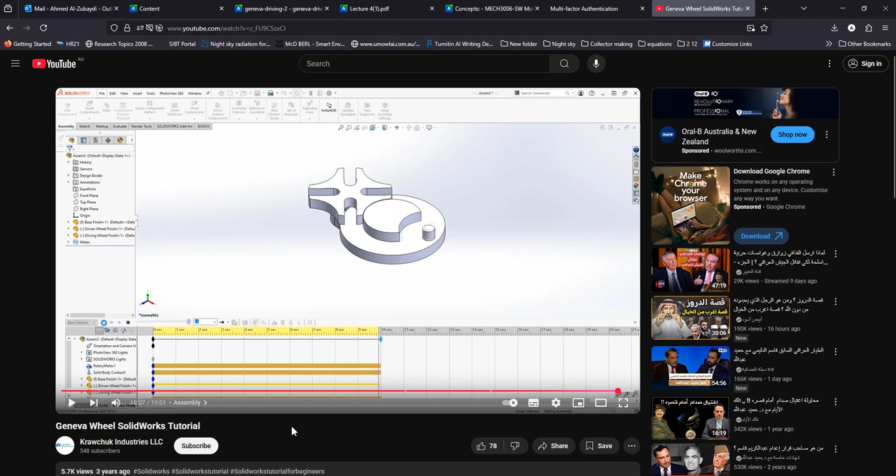We're going to go through this later, how to make the link between the 2 parts and make it operate the same way. It's going to make it run now. Just give me a second. Okay, so it's going to work like that.

We're going to add a motor to this part, and this will make the counting, or timing, for the other gear. After that, we're going to take some results, and this is something we need to learn during tomorrow's session.

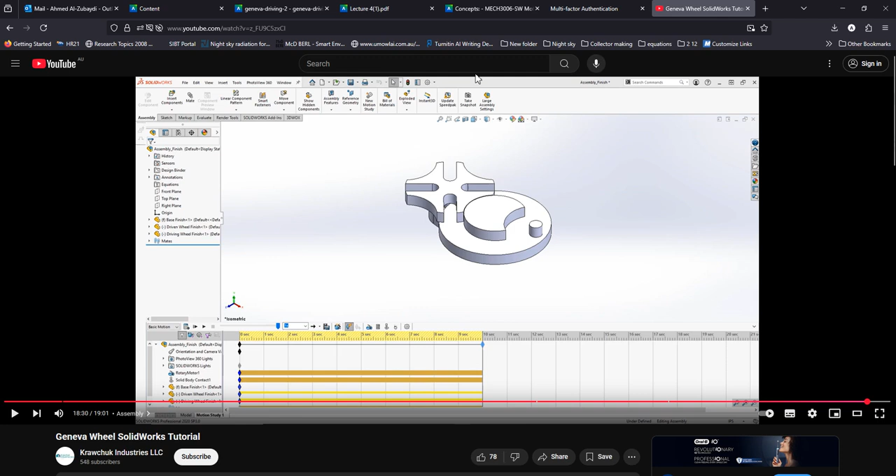Okay, and where is that? Well, the content — let me go to the material for this topic. Week 4 material for the practice session, that's what we're going to work on basically tomorrow.

You can see we have the practical instructions and the attachment for the parts, where most of the CAD models are made for you, and we're only going to apply some of the work. That's what we find as instruction here, like the SolidWorks motion analysis tutorial basics, how to add the motor — actually I can open this one for you.

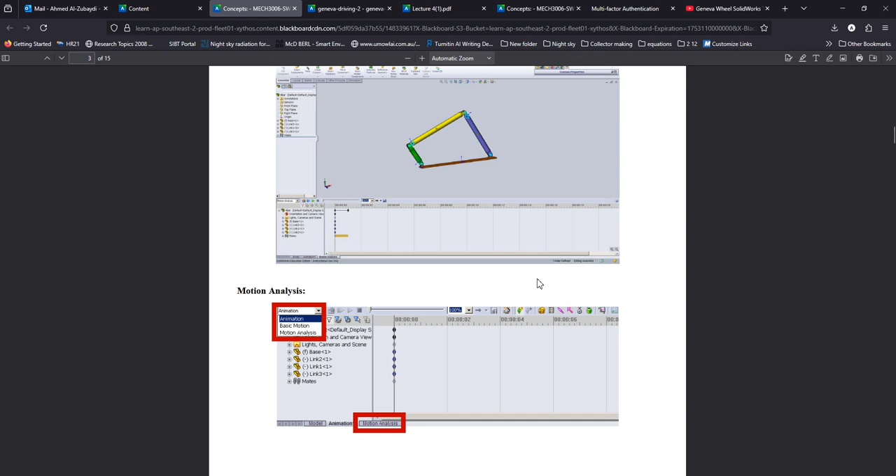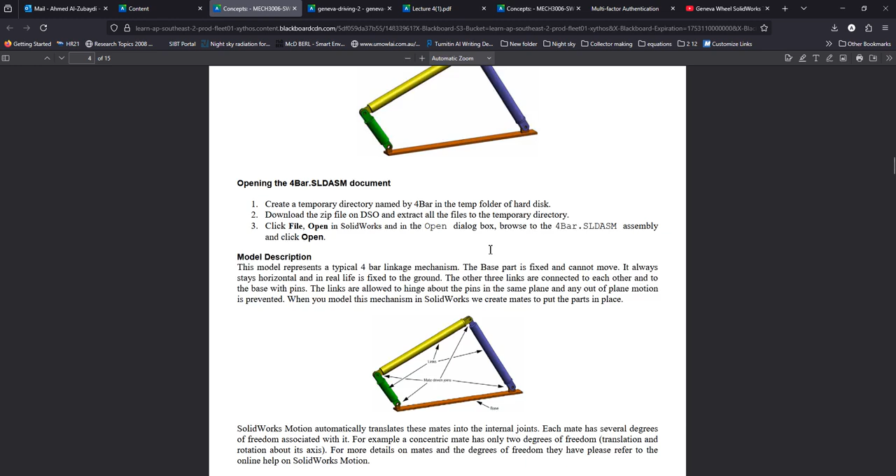The basics on how we can do the SolidWorks motion analysis, that's what we're going to download. We're going to do the animation without the study first, and do exercise number 1 for the 4-bar mechanism. You can see the work is going to start very easy.

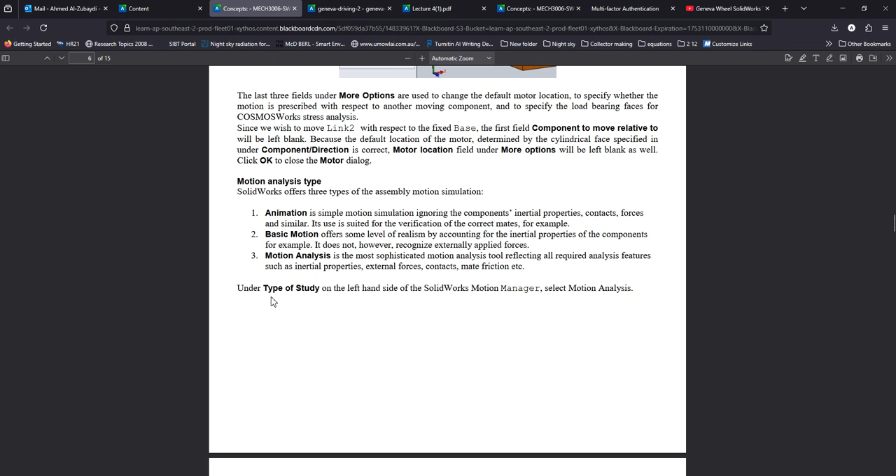We're going to open the things, do the mating, do the orientation of the camera view. We're going to select this point to add the motor, decide what the RPM value will be, do more options, do the work, and then do the animation, the basic motions, and the motion analysis, and we can simplify that.

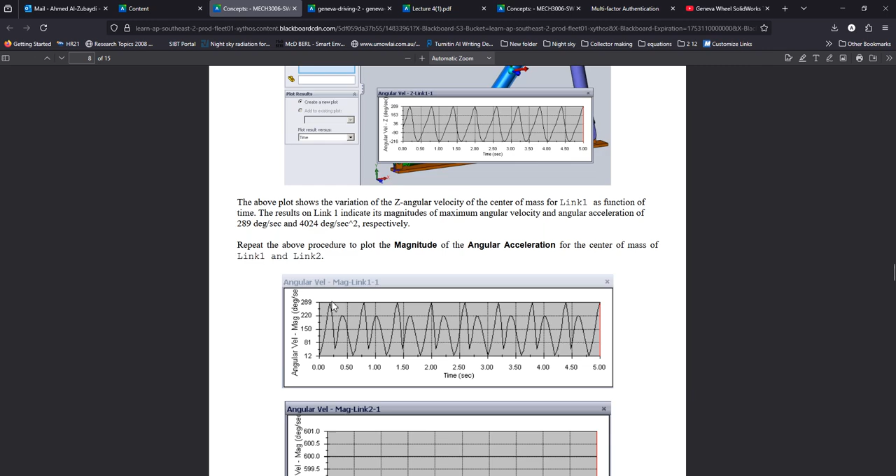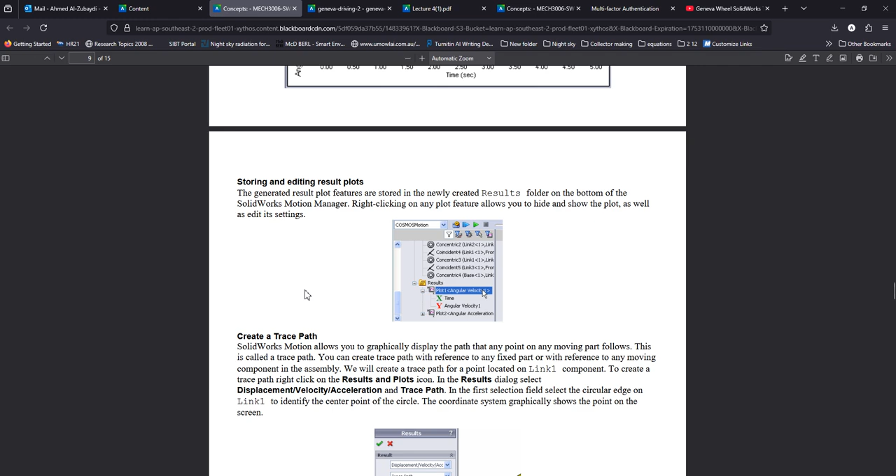So mainly we're going to do the motion analysis, and it will give us this panel. To make it run, we're going to have these drawings, and mainly this will be the drawing you need to find, copy and paste in your report, and that's what we're going to do for the first few weeks. That's for the starting and ending of the result plot.

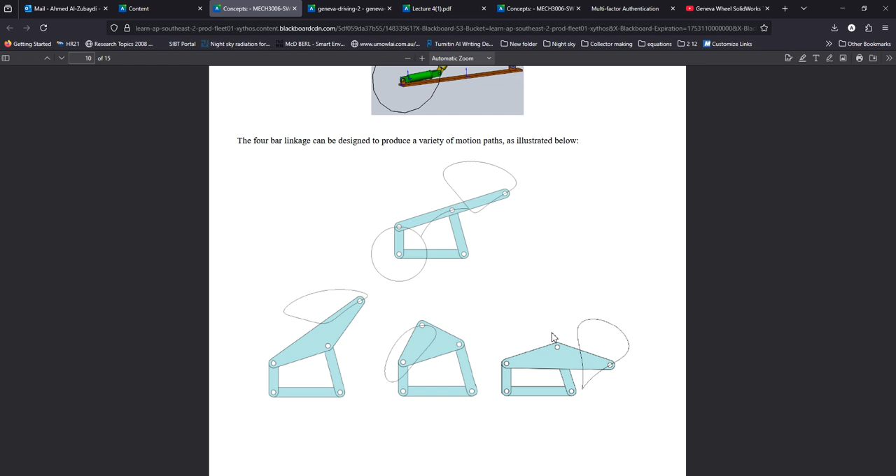That's if we add the result at this point — it will give me what the movement for this one will be, like the path of this point. You can see we can sketch the path of every point just to see the movement of this mechanism. That's the cam movement, or mechanism movement, and this is what we need, for example, to make certain mechanism applications for our work.

The second exercise is going to be about a slider crank mechanism. Usually it's going to be locked until, again, we do some work about the basic motion.

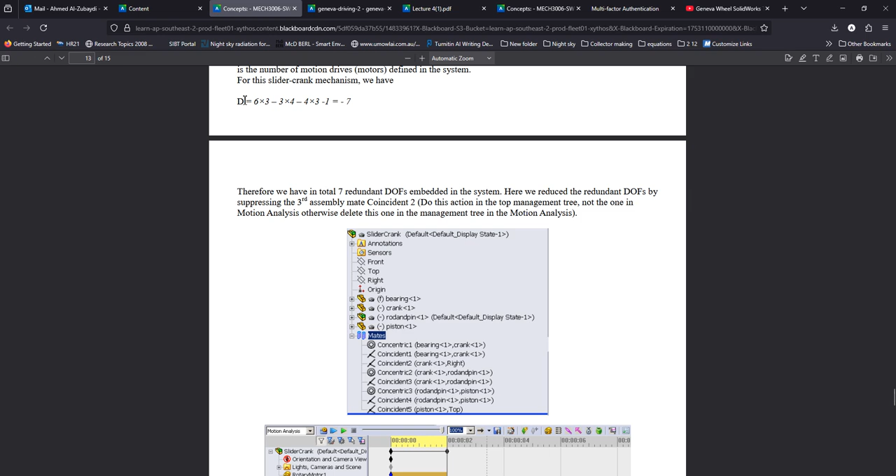It's going to actually give us some problem, and then we're going to do work on that, because the number of links is going to be more than degree of freedom, and it's going to be negative. So we need to do some changing in the mates and run it, and it's going to run after that.

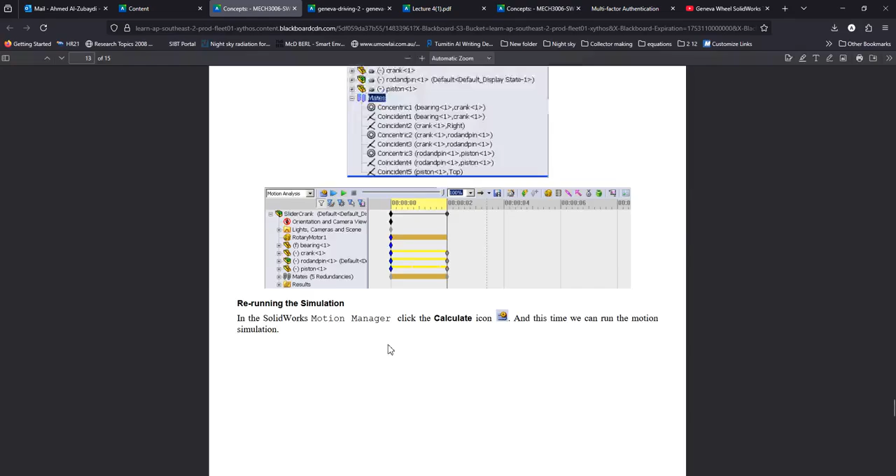We are going to learn about this one tomorrow in the class. Once again, the CAD models for those are already available, but we're going to work on this one right now.

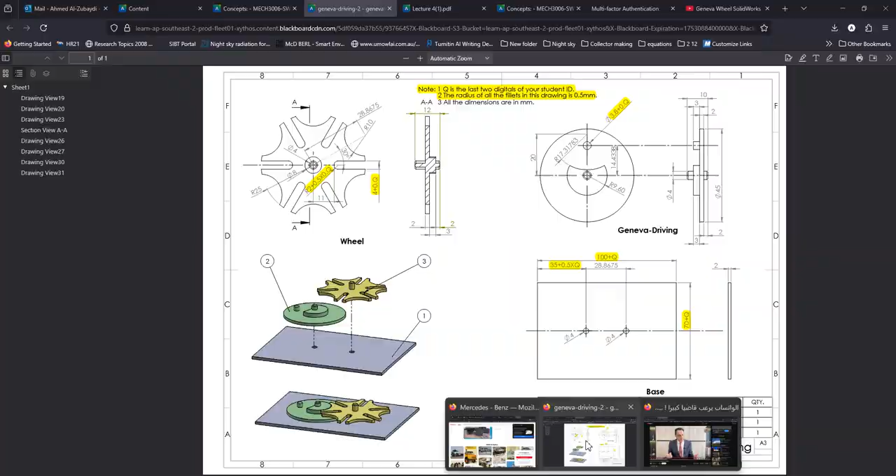So what I'm going to do first is take this to SolidWorks. I'm going to make a new part in SolidWorks, and start to do the sketching for the parts one by one. So away from that, you'll maybe again follow up the same steps.

I'm going to do it. First, we have to do the parts individually. Then we're going to do the assembly. Well, I know my computer is quite slow, so this will be part number one.

I get to save this one directly. I already prepared my folder, and I call it... well, actually I'm using the UTS account. For you, I'm going to use another one. So I'm going to make another folder within the folder. I cannot do that. So this will be the wheel first.

Okay, so the wheel part. Now, once again, just to see the dimensions of the thing. Just give me 1 second, I'll bring you back this one here. So we're talking about the wheel, that's going to be that part.

So you can see here that we're going to make a circle, then we're going to start to remove part of it. That way we can actually just make one, then we're going to be able to make the whole thing by doing the pattern.

Okay, the other side, well, actually I'm going to make the plate first, then I'm going to worry about the other dimensions like these two nuts, which are going to be fixed on the plate, and it's going to be as high to a certain level, so I'm going to have a contact with this part.

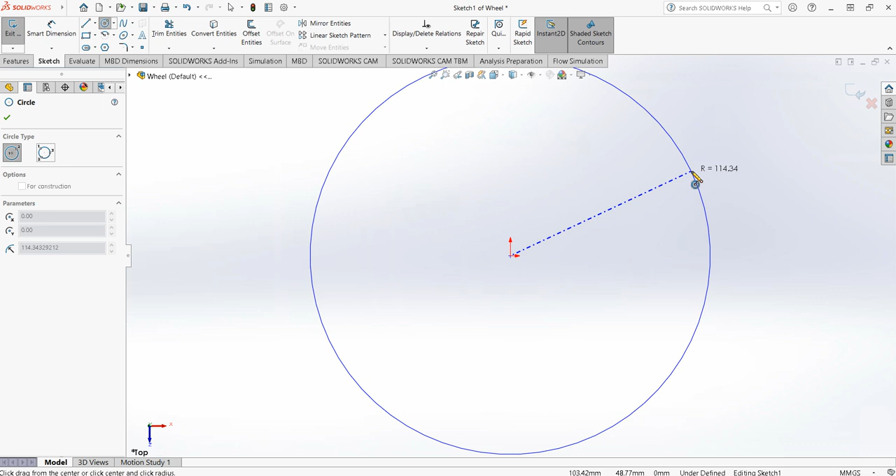Okay, so yes, as I told you earlier, we're going to make a sketch of a circle, and this one's going to have a radius of 28.8675 millimeters. You can see that I'm typing here, and this will make the radius of the part I would like to have. Now what I'm going to do is give this part a thickness of 2 millimeters.

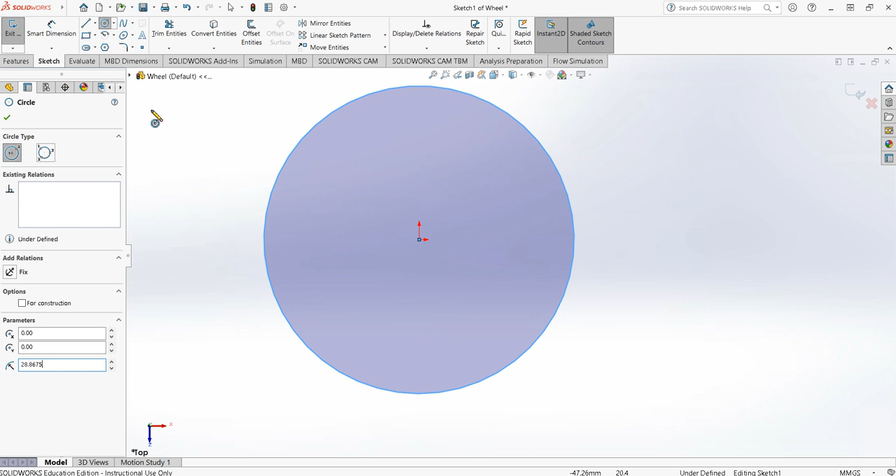Because it says that the thickness is 2 millimeters, so give the thickness here as 2 millimeters.

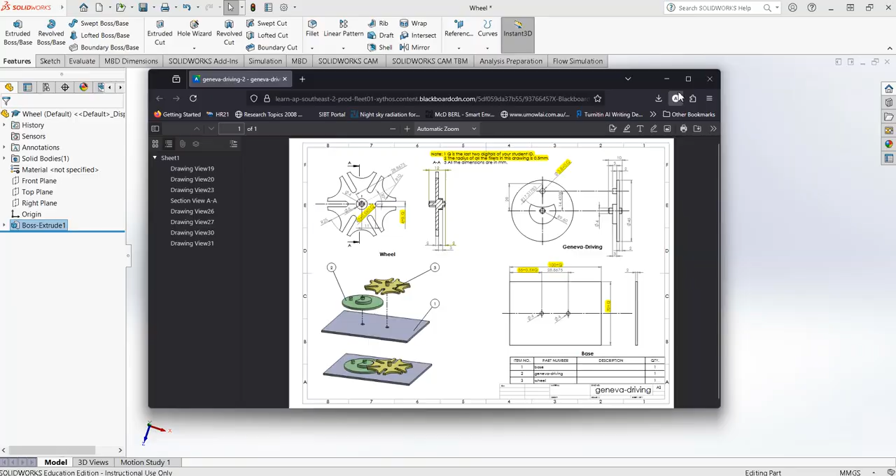Okay, now we've done. I can do the pattern from the beginning, but I'll do the pattern later. So now I'm going to keep sketching. What we're going to do is make the channel first, this one here.

For this channel, the gap is 4 plus Q. So if your Q is 99, this will be 4.99. If your Q is 0.5 or 50, this will be 4.5 and so on. Same thing for the radius. Of course, the radius is going to be the same, so I don't have to worry about that because I'm going to make it as a fillet.

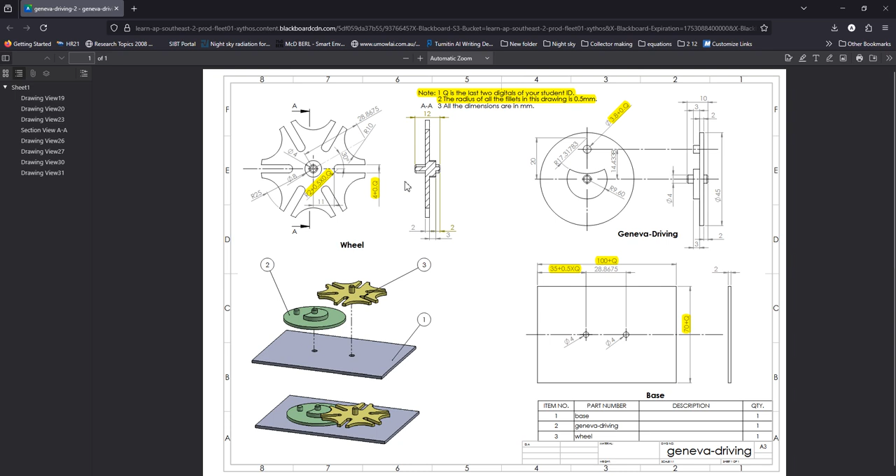Now the distance from the center to this one is equal to 11 millimeters. That means if the diameter, the radius is 28.8675, I'm going to sketch a line from here to here, which is 11 millimeters, and then make a square shape. Then I'm going to give it a fillet shape later. We're going to work on that. You can see it's to the line, so it shouldn't be an issue.

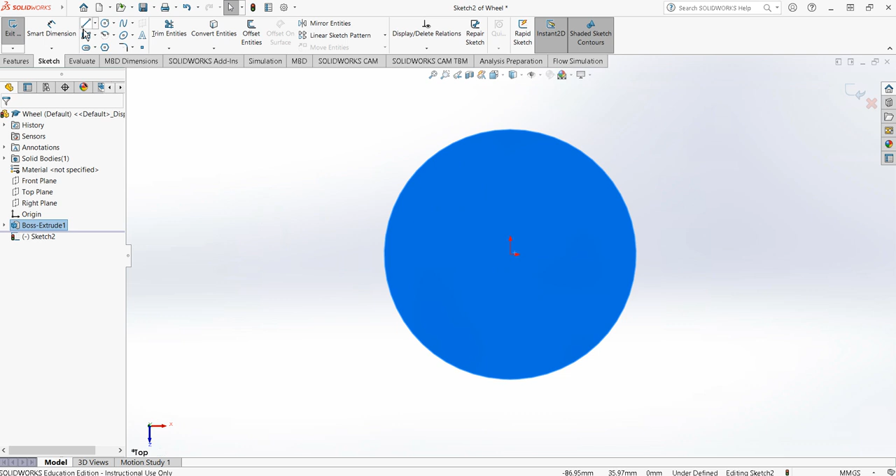Again, I'm going to work on that. Click on that face, then make a sketch, and then—oh wait a second. Before that, let me do this one. Okay, I'm going to sketch now on that face, and make a line that is 11 millimeters in length. That's 11.

Now with this 11, I'm going to start to make my square shape. Then I'm going to cut the things off, and then make a fillet for it. Let's start to do that, and what we're going to do is the square. Yeah, let me do the square.

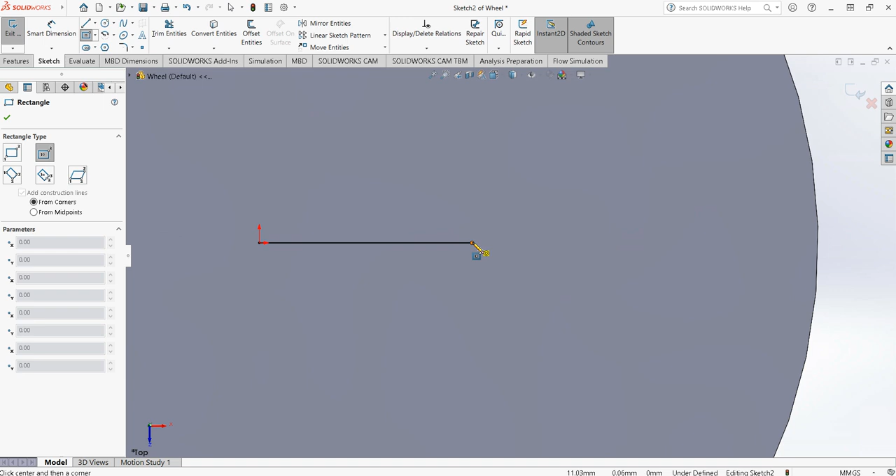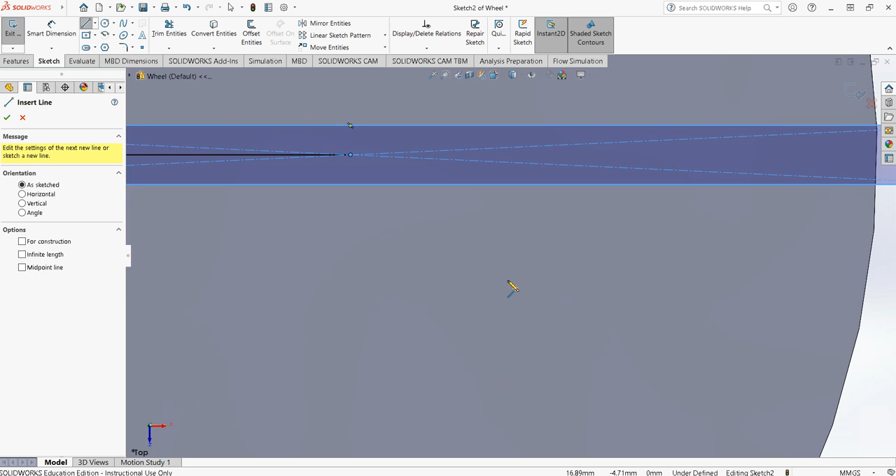This will be a very nice trick I haven't done before, so I'm going to make that one. I know I'm going to remove the rest that I don't need, but I think this will be the easiest thing we can do. I don't have to give it any length because the extra isn't going to be anything—I'm not going to cut anything. So the best thing to do is just make a line from here down to here.

Now I've got the thing. Now what I need to do is simply cut the whole thing here—everything that I don't need, including these two lines.

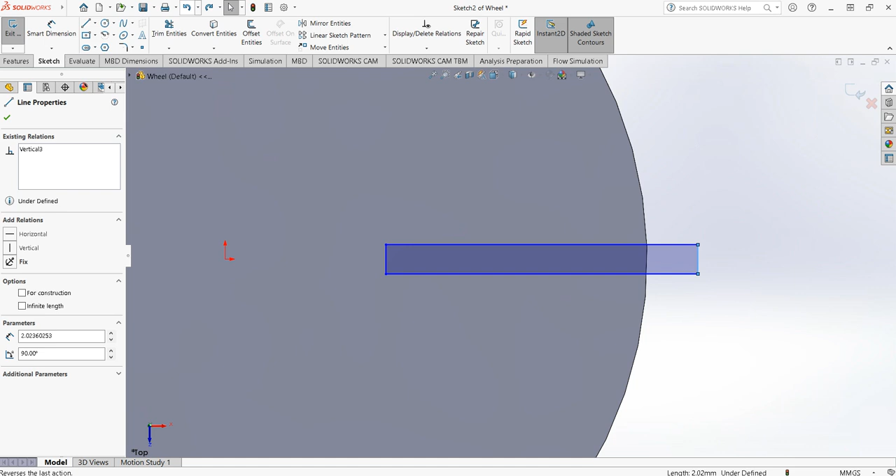Now definitely the width for me should be 4, so I'm going to click on that line and make it 4 millimeters because that's what the drawings asked me to do. Oh, I think I went in the wrong direction. So I'm going to do that just before removing the lines. Okay, now I'm going to change that to 4.

I'll tell you why I did that—this one has been shifted up, so I'm going to make that as 4. Now it's gone up on both sides. Then I'm going to sketch that line and continue with just removing the part that we don't need.

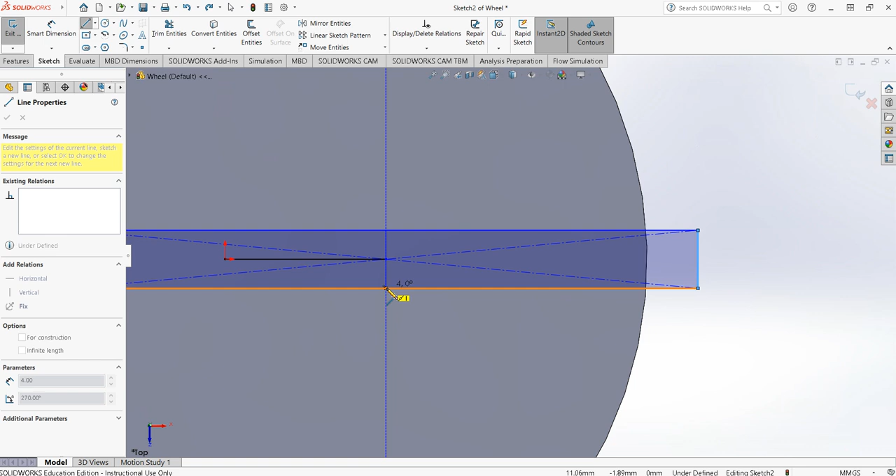Now I'm going to just cut the things that I don't need. Now I can cut and then make it a fillet. Just remember that this should always be 11, so if 11, that means the radius is 2. Okay, so again, I'll do it too.

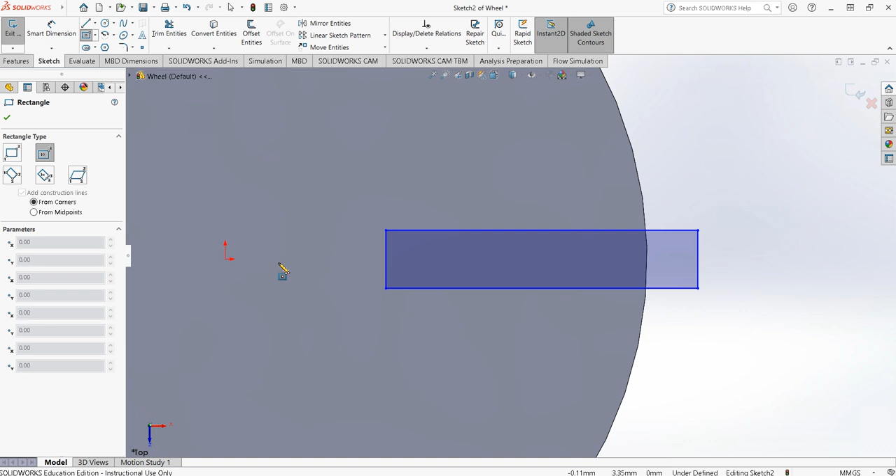So what I'm going to do is just make a fillet here. No, I'm going to make a fillet—it's much easier. So what I'm going to do now is extrude cut that and take it down with—oh wait a second, there we still have something here.

Now what I'm going to do is I can do that now. I can simply make a circular pattern for that part. So that's the problem—we have to select every single line that we have there.

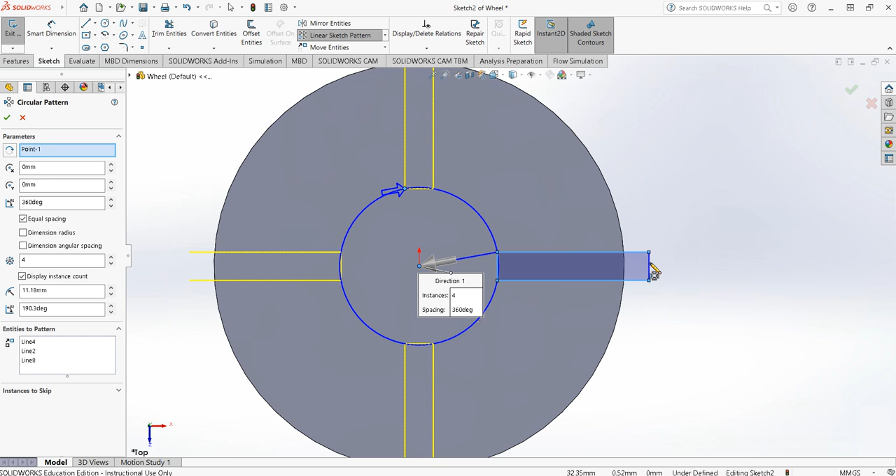Just cut that part, extrude cut, and we're going to have it cut. Now we have this shape.

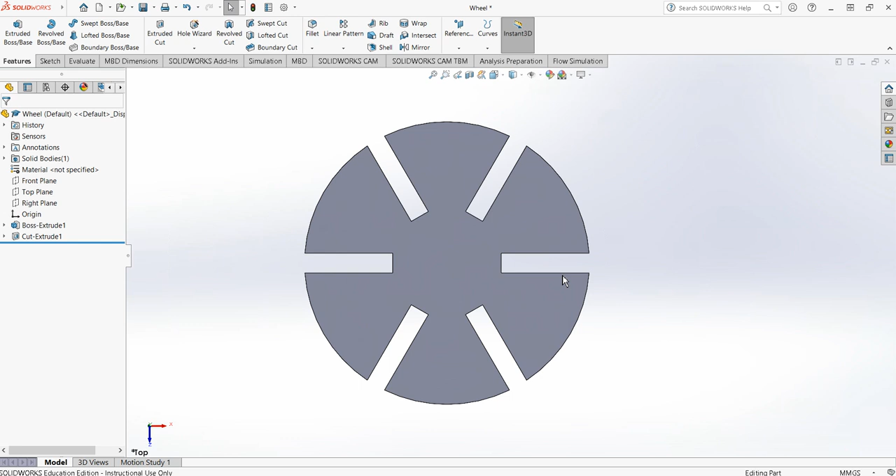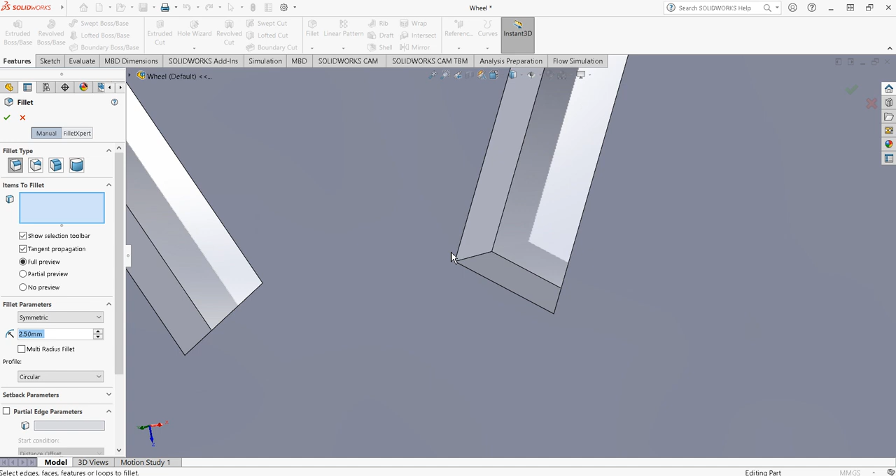Now remember once again that what we need to do is change that to a fillet, so I can simply do that. Go to the fillet and select the fillet we'd like to have—it's not 10 definitely, it's going to be 2.5 for me. So I'll put 2.5 for the radius. Now I'm going to start selecting the edges, and this will give me 2.5.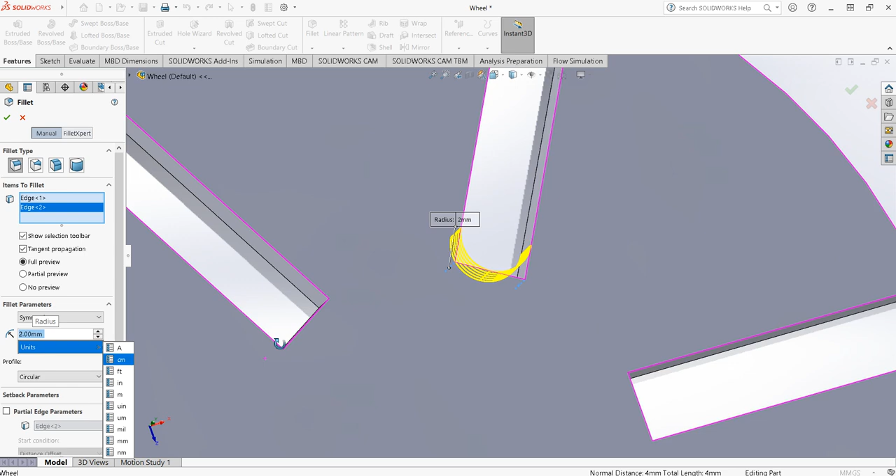That's not 2.5. I need to be 2 in that case. Okay, because mine is 4. Yours is different. Now that will make it great.

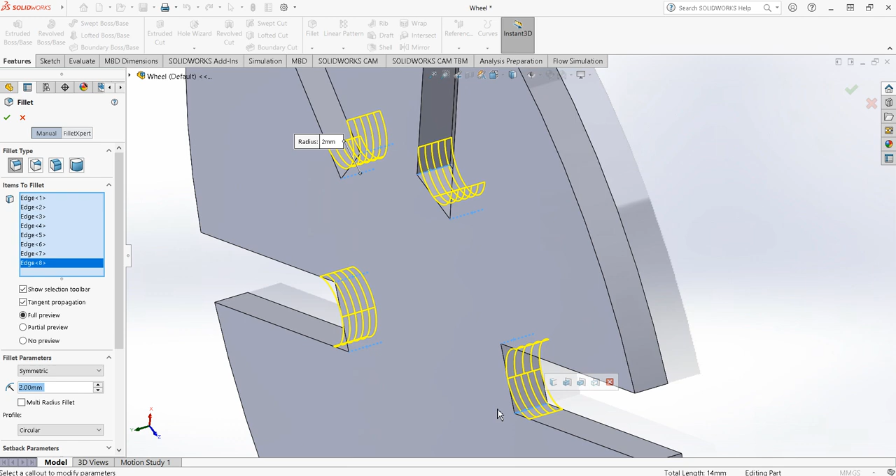Sorry, select that. Okay, to make the fillets for all the edges, because we're going to add a pin on the other side, and we don't want it to have sharp, cute 90-degree edges. That will make it not nice.

Okay, now this one is done, this one is done, and this one is done. Well, we almost have the same disc. Now what we're missing is these parts here, if you remember. I'm going to bring the drawings to here.

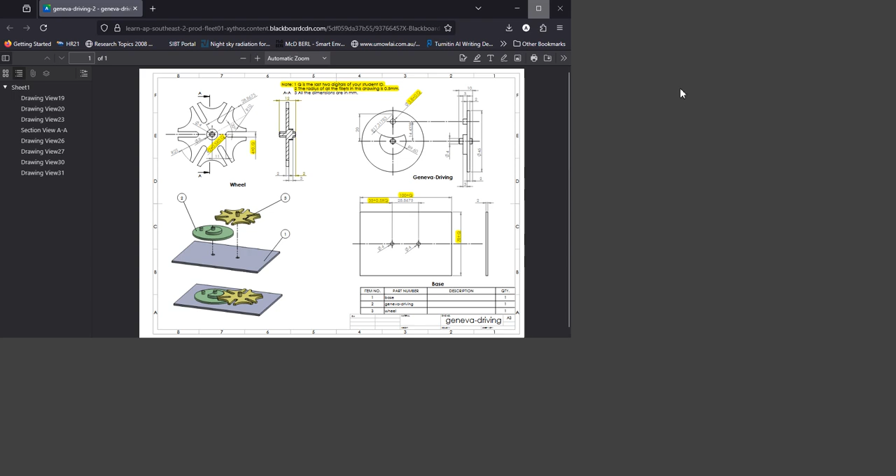Okay, now we just cut these sides. Now we need to cut these sides, so I'm going to do it the same way. Let's see what dimensions we've been given. We've been given that the center of the point, where the radius is going to be 10, has a 30 degree angle from the linear center, from the horizontal center.

Wait a second, there's something here that says 25. Wait, oh yeah. This one is 25, now this one is obviously 10, with 30 degrees. Let's see how we can do that.

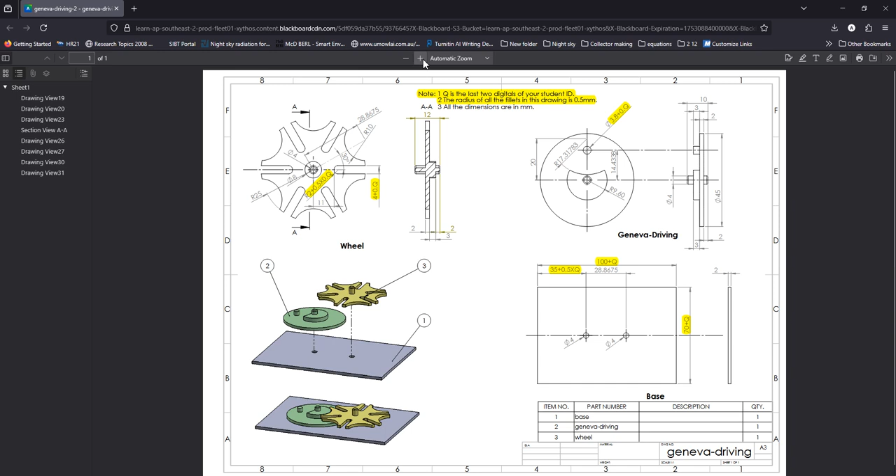Distance to, oh wait a second, the center to the distance of that is 28.67. So wait, what is the radius of this one? Let me check that again, maybe I'm just missing something here. Let me zoom in. Where am I?

Okay, we did that, that's correct, it's 4, that's correct. Oh wait a second, that's 25, and this is 28. Okay, sorry for that.

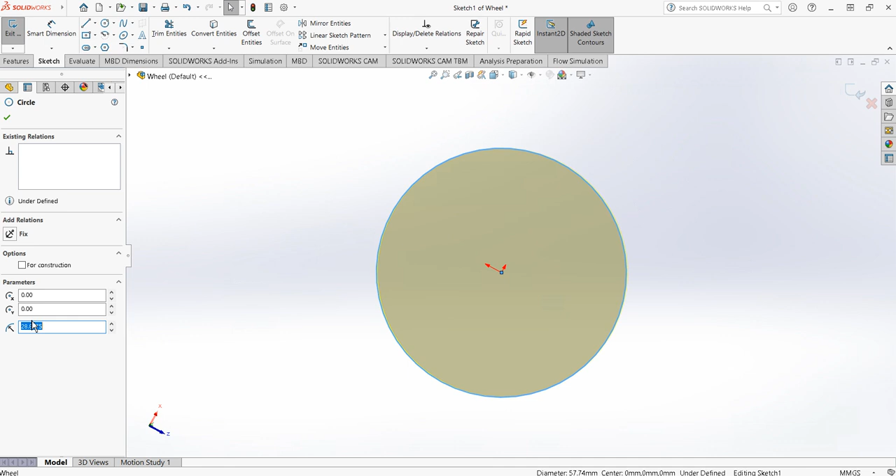Now that will actually be a good thing because I'm going to share this part with you, you only have to change some of the dimensions. Let's see how we're going to change these dimensions. What I'm going to do is go to this part, click on that, and change the radius to 25 millimeters.

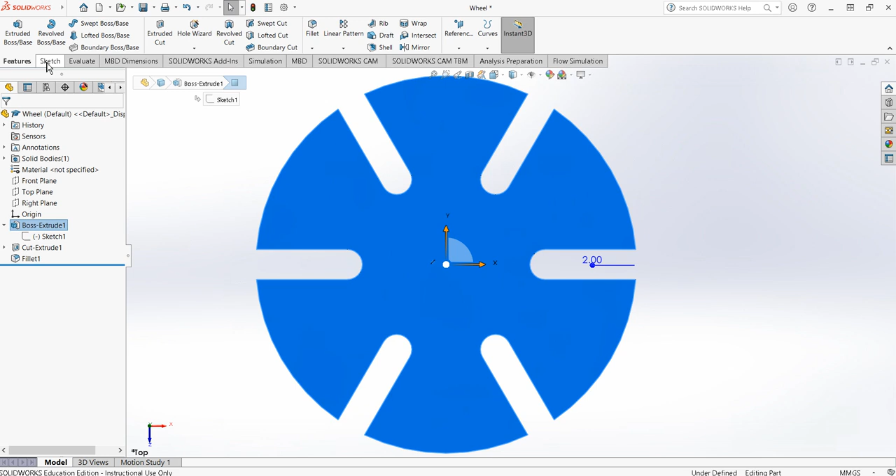25. Okay, now I'm going to say okay, and then exit the sketch. Now it's done. What I'm going to check now is that the distance from the center to the end here is going to be 25. So I click on that face, and we're going to sketch. Let me check, I just like the line, I don't like to have the other things.

Okay, now it's 11, 11.1. It doesn't matter, it's 11. Okay, so now that's done.

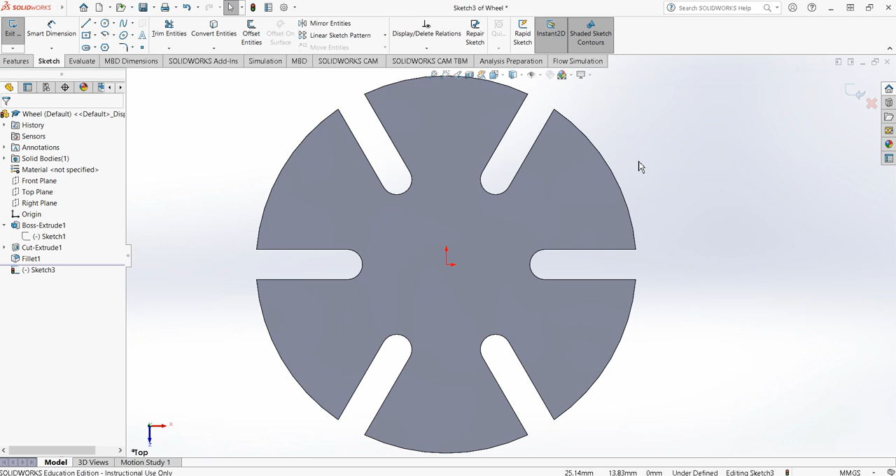Now what I'm going to do is draw a line from here going at 30 degrees, and then sketch the radius of 10 millimeters. To do that, I'm going to use a line that isn't part of the actual part, so it's going to be a construction line. I'm going to sketch a line randomly.

Okay, and I'm going to make 2 changes on it. The first is that the distance here should be 28.8675 millimeters, that's its length. The other parameter I can change is the angle, which is going to be 30 degrees. So I'm going to set it at 30 degrees. And now, boom, it's done.

Now the other thing we need to do is make an arc that has a radius of 10 millimeters. So we come to this center, and let's make it a circle instead. It doesn't matter, because the circle is going to be much easier to change the radius, since using a line may change its length, and that's not a wise move. So just make a circle that has a radius of 10 millimeters. Click on that, change that to 10.

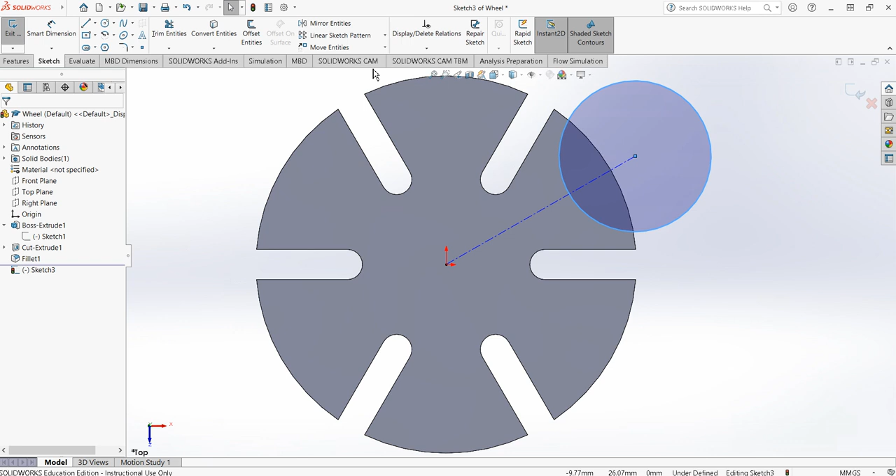And we're done. So again, I'm going to do the same thing exactly like what I've done earlier. I know this may not be the easiest way, but it's the shortest cut we have. So again, to make the circular pattern for this one, it's... no actually we have 1, 2, oh sorry, we said it's 6. So we're going to have 6 circles. Now let's put it in position, and we say okay.

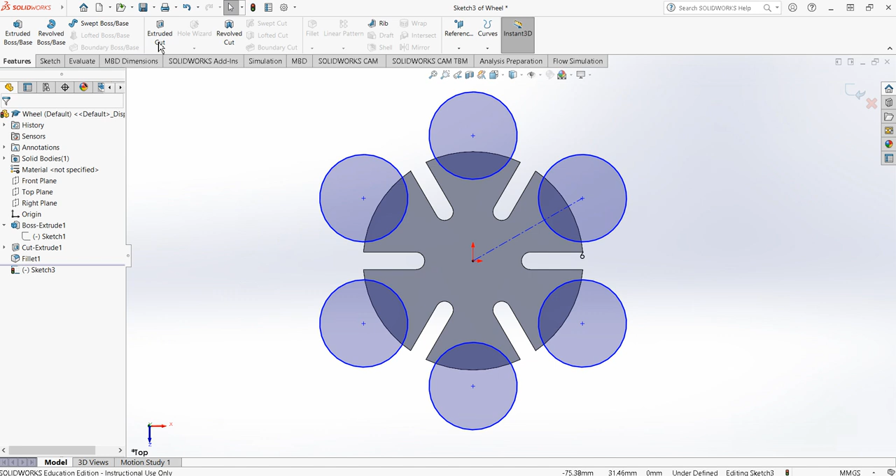Now we have these things. I'm going to do the same extrude cut, get into the other side, and we have the shape done. Wow, this looks nice.

Okay, so now I'm going to save the shape, then we're going to start the other parameters. One of the parameters we have, well, each one is going to be on a different face. We're going to have this cylindrical shape. It seems to be hollow, so we're going to have, oh no sorry, that's all.

Okay, so we're going to have that part, and we have 2 levels on the other side. The height of this part, below we're going to have 3, then 2. 3 and 2.

From the top we have 2, 3, that's 5, 7. 7 minus... 12 will make it 5. So the height of this one is 5. And the height of the other side is also 5, but distributed into 3 and 2. Okay, so we're going to work on that.

Now let's see about the diameters we have. We have a 4 millimeter diameter. It seems that it has a fillet at the top - chamfer, sorry, I'm going to do that. The inner one is 4 millimeter, going all the way from both sides. And the other one is 8 millimeter for the big one. So let's do that now.

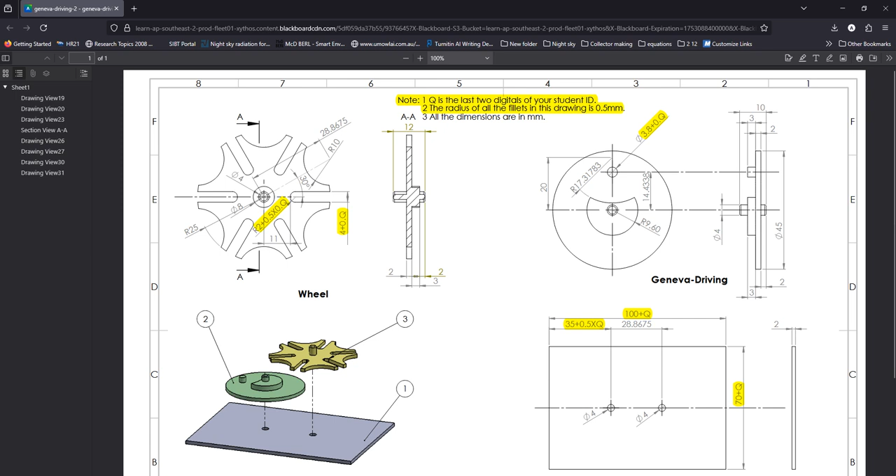And we're going to have just a small trick there. Okay, so let's go back once again. We're going to click on that face. It doesn't matter which face you select to have the 2 levels and which one is going to be the 1 level. I'm going to sketch on that. We have the center. We're going to have on the center the radius of 2 to make it 4. Okay, that will be 4 for everyone.

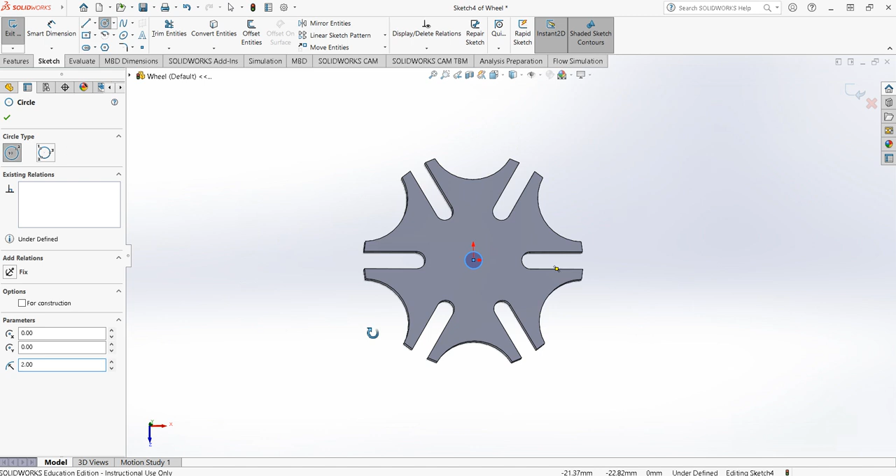I cannot see many things to be changed for you later, but the width of that - okay, so that's what you're going to work on. Now, this one needs to go 5 up and 5 below. Remember that thickness here is 2, so it's going to be 5 up and 7 below. And that's what we're going to work on.

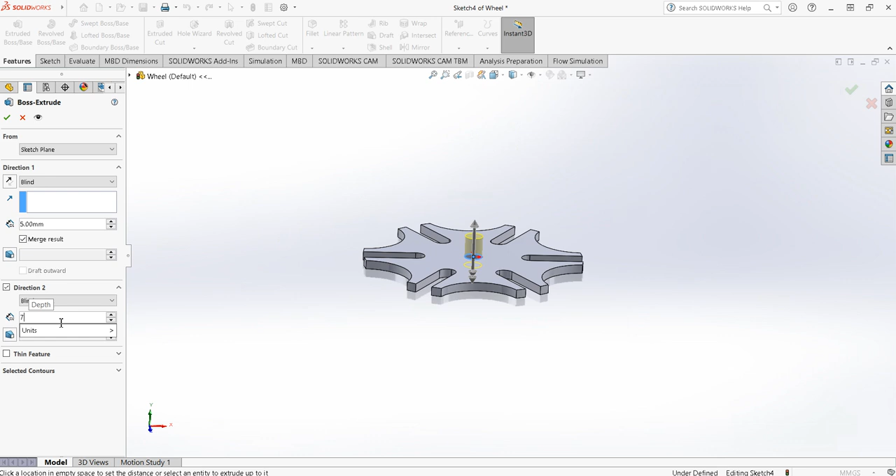So we go to the features, we're going to do the extrude, and now it's 5 here, make it 5. And now I get to have direction 2, and direction 2 I'm going to make it 7. Okay, so here we are. Now it's 7 from below, 5 from the top.

Now we can add the chamfer we have here. So let's look about how we're going to get the chamfering here. It should be somewhere here. So we have the fillet and we have the chamfer. Click on the chamfer. Now I will put just 2 millimeters chamfer. Okay, and we're going to click on this edge.

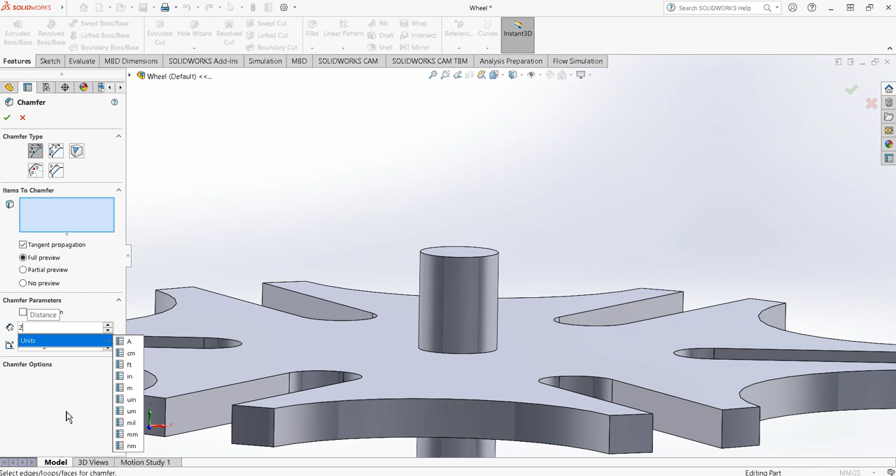Wait a second, I shouldn't do that. Just the edge. Wait a second. It's the dimension, 2 millimeters, 45 degree. Wait a second, I'm sure that there's something wrong. Let me see how it's going to look like. No, that's definitely not the chamfer I would like to have. Okay, so let's go back.

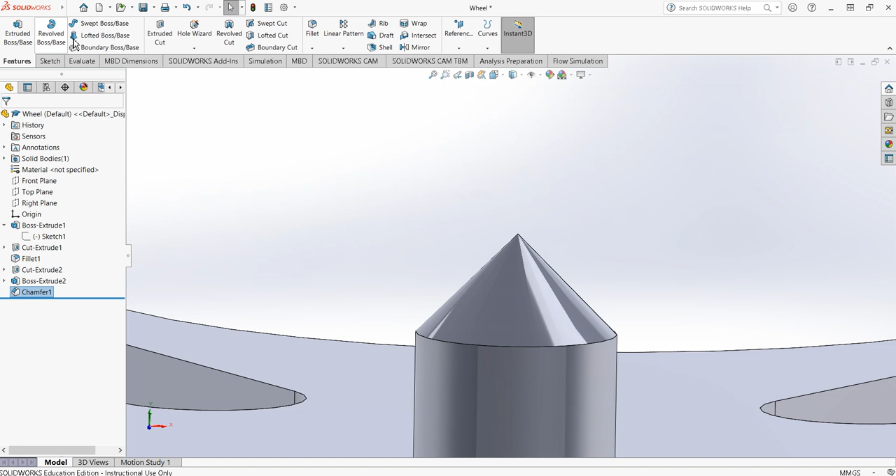Oh wait a second, it's already 2, so we should get something very small. So again, let's go to the fillet chamfer, and I'm going to choose something which is going to be very small, maybe just 0.25. Let's see how it's going to look like. Yes. Oh wait a second, 0.25.

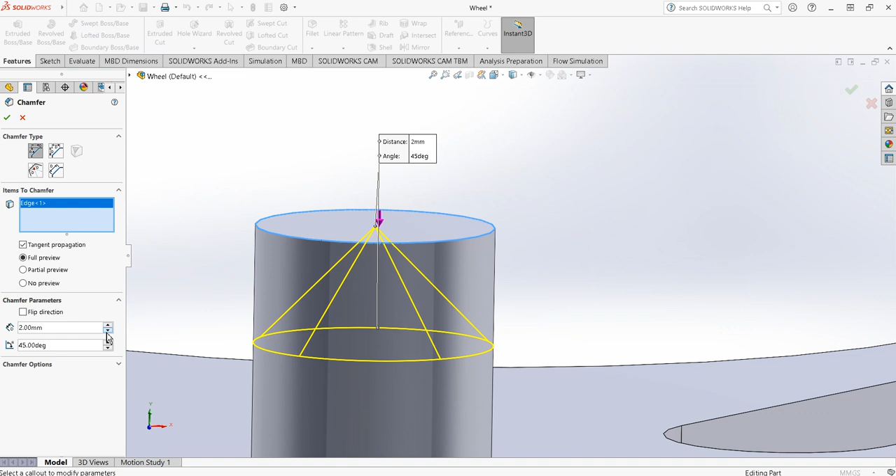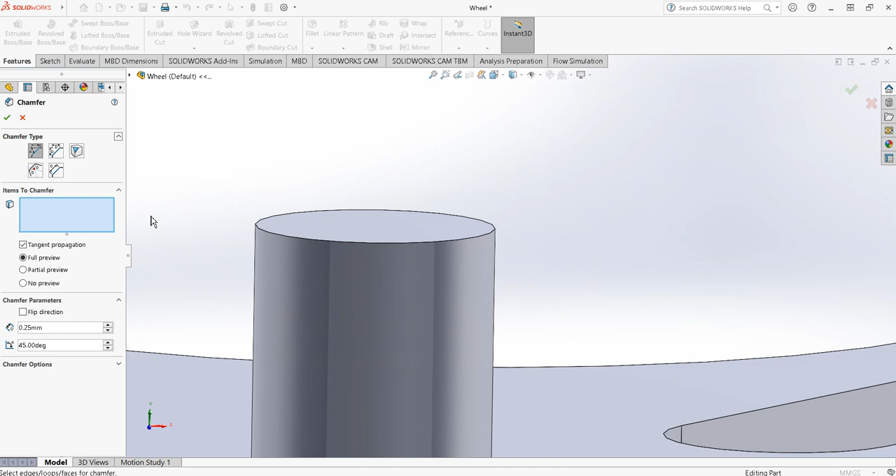Maybe if I'm going to change that... going to do the work. So, 0.25 for the chamfer. Tangent propagation, full preview. Yeah, now it's done. So do this one first, then you can do this one second.

So now I will do it to the other side as well, because look, it's much easier to be done in one go rather than going back once again to do it. Okay, now we have the chamfer for this part.

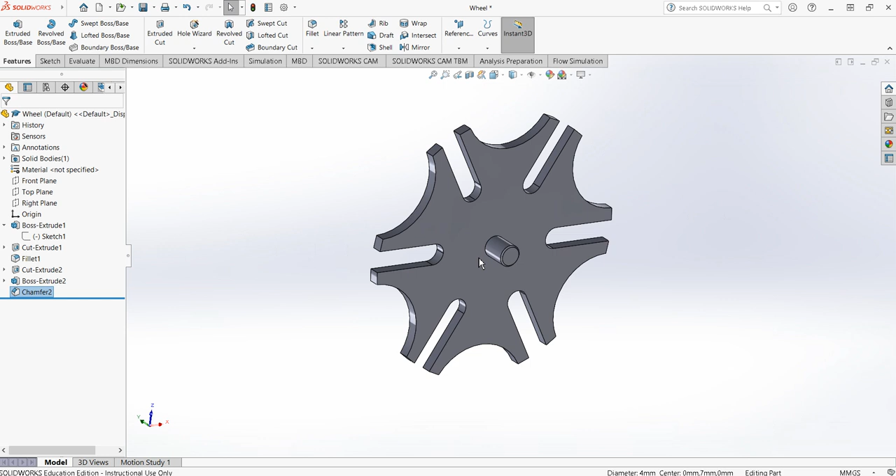Now for this part, for the other side, we need to take something like an 8mm diameter circle to the height of 3mm. So now I'm going to go to that side, I'm going to sketch. The easiest way to do the work is clicking on that edge, and then doing something like the convert entities, to make a circle, then again do the offset entities of this one. Now we know that the 8mm diameter means it's 4mm radius. The actual radius we have is 2, so we're only going to make this distance to be 2mm too.

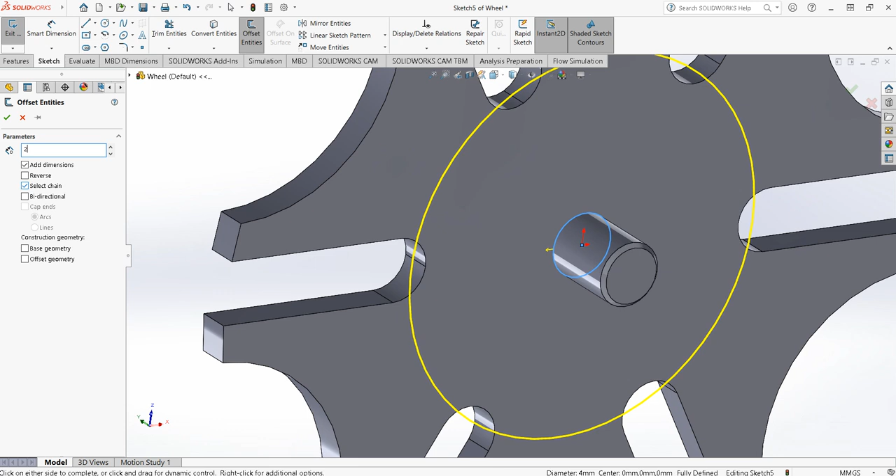Okay, now it's okay. We're going to do the features, take this one up, and we're going to do that by 3mm, and say okay. Okay, now we've done. So that's part number 1.

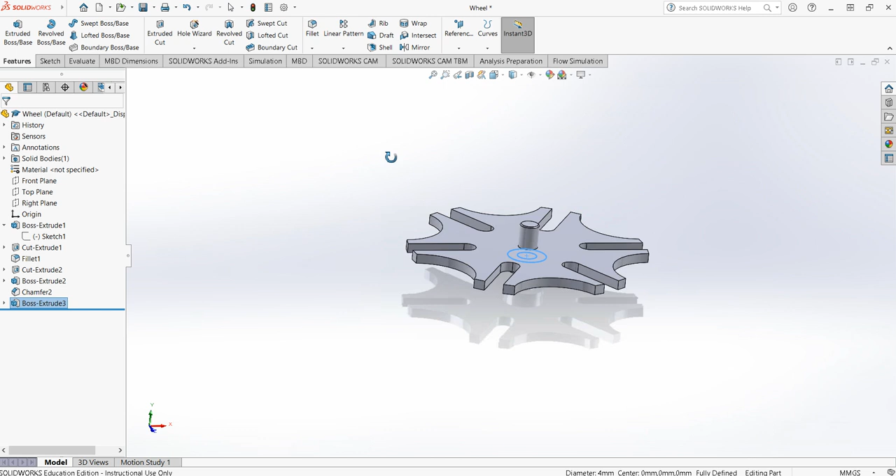So once again, just remember the only difference that should be made between each other is going to be the gap we have here. And if I give you this one and you'd like to make changes, the easiest way is through this extrude cut number 1. So if you're going to try to change things, try to change the width here. But remember, you need to make the lines, redo everything as I've done it, and change things if you want to remove that and bring it back later. Okay, so that's...

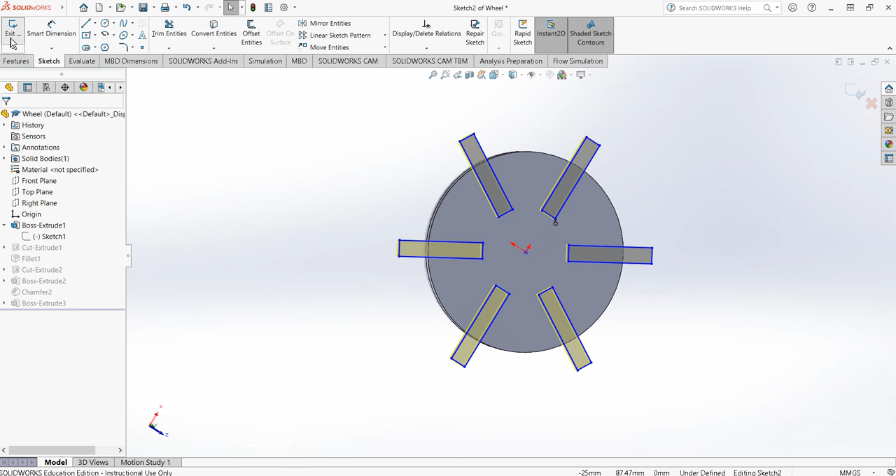Part number 1. I'm going to make another video for part number 2 because I don't want this video to be too long.